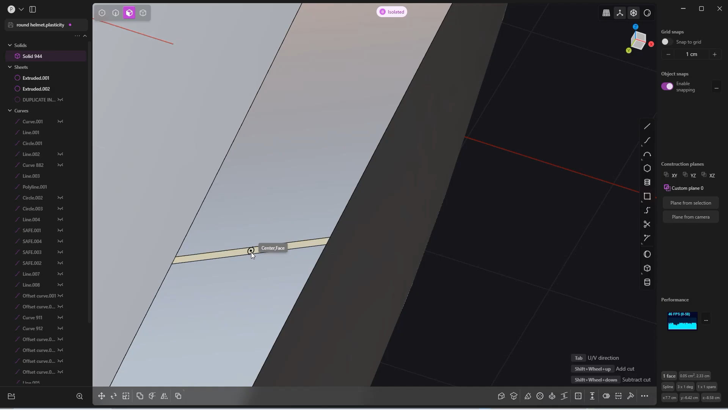It should be uniform and realistic. Adjust as needed to match real-world helmet specifications.

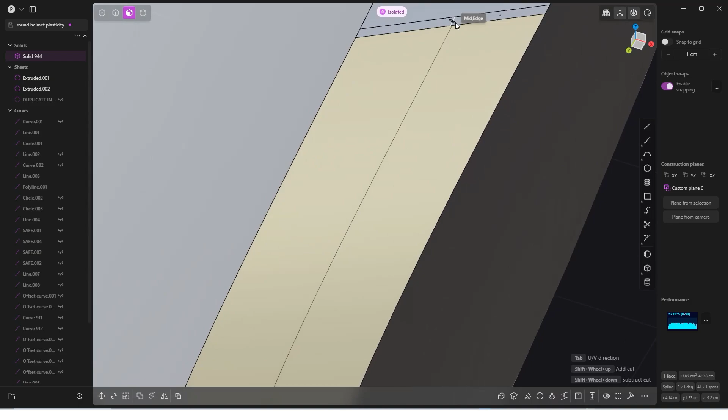Tips for success: stay patient and take your time. Precision is crucial at this stage. Use your reference image frequently to ensure accuracy. Don't be afraid to undo and retry if something doesn't look right. Keep your model organized with proper naming conventions for each part.

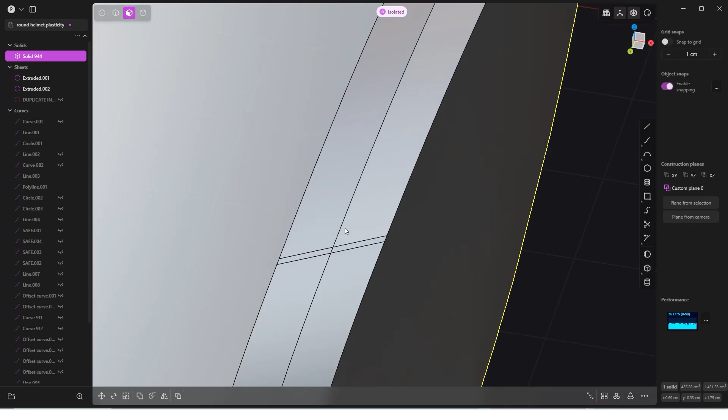Solving design blocks. As you work, you might encounter some design challenges or blocks. Remember, most of these can be solved using these basic tools we're covering. The key is to stay familiar with them and practice regularly. As you improve, you'll find creative solutions to complex design problems using just these fundamental commands.

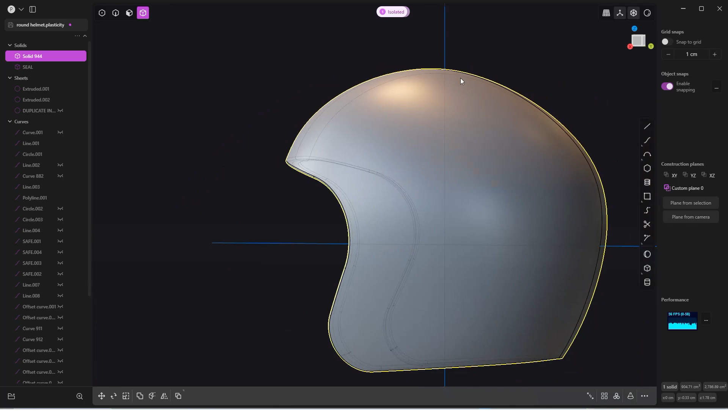That wraps up our second phase of modeling the round helmet. We've completed the outer shell and added proper thickness to our model. In our next video, we'll start adding details to bring our helmet to life. Remember, mastering these basic tools is the foundation of great 3D modeling. Keep practicing and you'll see your skills improve with each project.